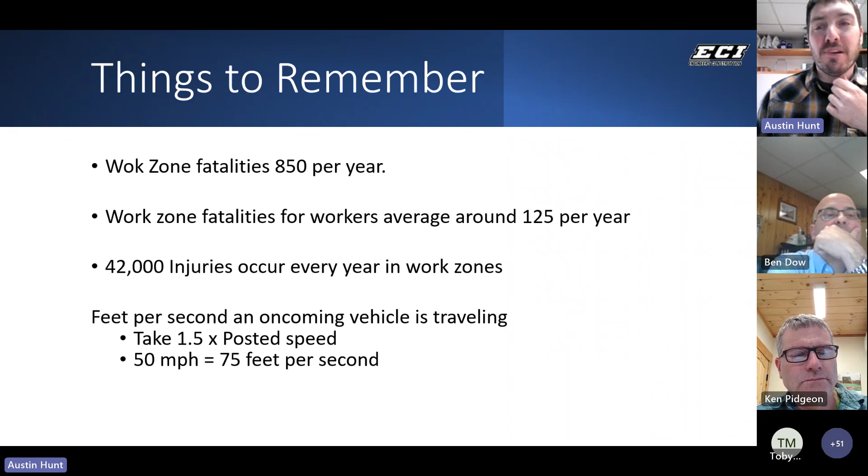So the topic this week I have is work zone awareness. Some things to remember. Work zone fatalities: there are 850 per year on average. This is the public and workers, and worker fatalities are around 125 per year, and then just 42,000 injuries occur every year in work zones. So it's something to keep in mind.

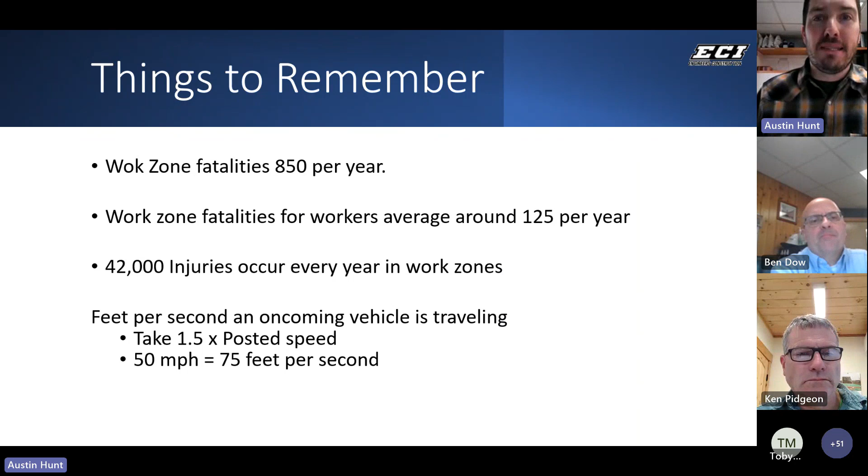Also, a good way to calculate how long you have to react to something: if the speed limit around your work zone is 50 miles per hour, you take that and times it by 1.5, so you get about 75 feet per second. So you don't have a lot of time to react when a car or something is coming. You have a split second to make a decision on what you're going to do. So it's good to look out for things and watch what's going on around you.

Some of the things to mitigate the risks when you're designing a traffic plan: can you eliminate the problem? Can you use detours, alternate routes? If you're working on the interstate, can you route traffic to the other lane to completely get it away from you? Can you use barriers that will protect the workers in the work zone from traffic? Engineering controls, traffic control devices, crash attenuators, things like that won't put anyone in harm's way, like a flagger staying out in the road, but will still get the driver's attention and stop them.

Then we can also use administrative control. These are things like doing work at night when traffic isn't as heavy. You might close the road at night for just local traffic only. And then finally, the last thing you can use is a flagger. Flaggers stay out on the road, but these put people in harm's way. Flagger is a very dangerous position.

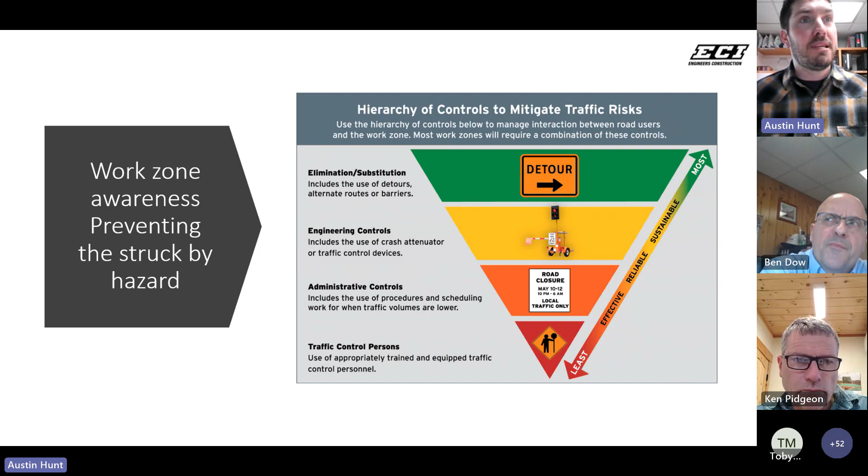Some best practices are to have a plan, review and understand the plan. Clearly identify any struck-by potential and discuss areas where you're going to access the zone or leave the zone, walk out of it. Have clear areas where that is. Keep yourself and fellow workers inside the closed lane. You don't want to be stepping out in traffic, things like that. And keep your head on a swivel and know your surroundings.

If you have to turn your back to traffic, make sure someone is there to look out for you and be able to see what's coming from behind you. If you can, avoid turning your back to traffic. Also, avoid blind spots so you can be seen. That also goes along with being visible. Wear your PPE, your vest, your high-vis clothing, things like that.

Work zones, traffic, public can be very unpredictable, and they can be on their phone or under the influence, something like that. So it's good to be aware and watch out for things. Good to have a plan and discuss all these things in your morning brief with your crew and during the JHA process. That's really all I have.

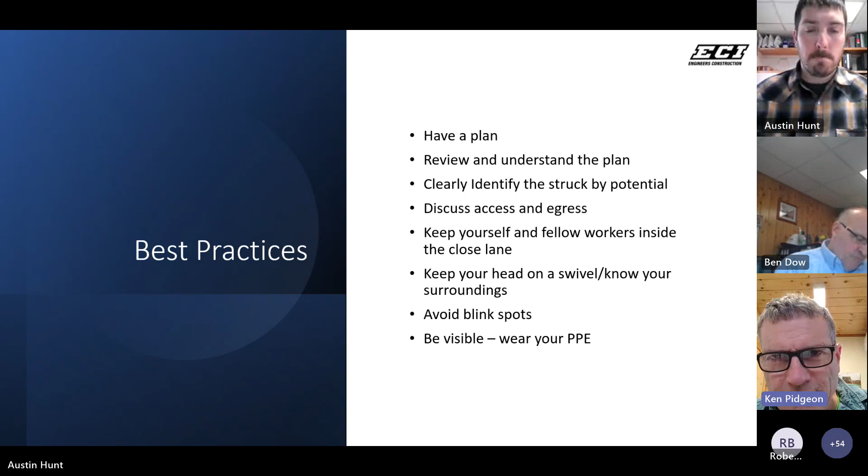Thanks, Austin. Being visible is important, obviously, and sometimes just being highly visible with high-vis clothing isn't quite enough. If there's a lot going on, the motorist needs to see movement of that bright person. That's one of the reasons the flaggers for Williston Road start out using the stop-go paddles with the flashing lights on them.

Are they still using those? I don't know. I know night work they are required to have that. During the day I don't think so, maybe not so much.

But certainly something with movement. If you've got a stop-go paddle, just moving it a little bit helps, because when you come up to a busy construction site, your eyes are trying to absorb everything, and that one little guy standing out front not moving isn't really effective.

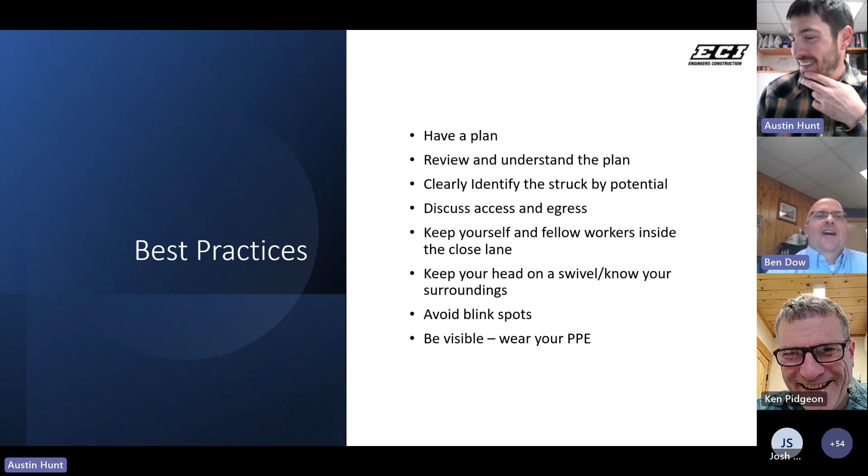No, we lost you, Ken? I think we lost him. Oh, no, I'm here. Oh, there you are. Okay, I'm going to switch, I'm going to take over. All right.

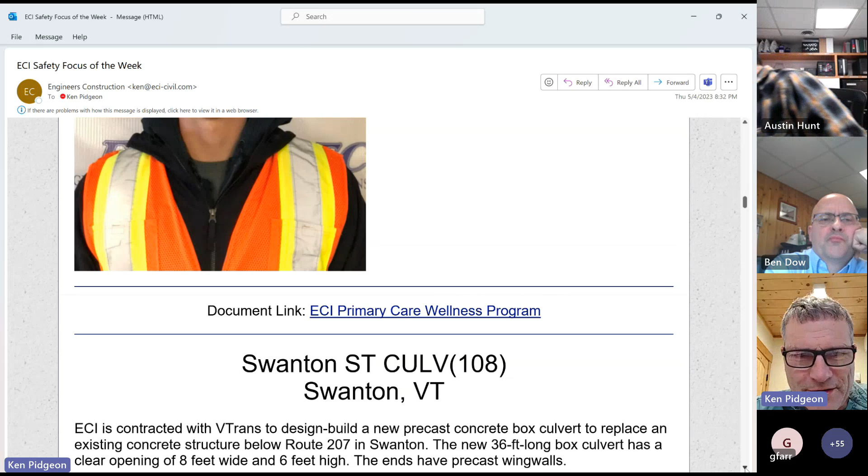And this week we're talking about the Swanton ST Culvert 108 in Swanton. Mark Peloquin, are you on? I am. You want to take over the screen, or you want me to scroll? You can scroll, Ken. Okay, I'll get scrolled up to the text for you, and you can start.

So ECI was contracted to do a design build of a new precast box culvert in Swanton on Route 207. The design had some minimum requirements: it was 36 feet with an opening of 8 by 6 and 4 precast wing walls. The work required a maximum of a 3-day road closure, which meant to put a new box in, we had to close the whole road.

We started last Friday at 7 a.m. closing the road, which meant we'd have to reopen it by Monday morning at 7 a.m. The ECI work crews, including Charlie's crew and Charlie Fecto and Rob Barber's crews, worked Friday night. Charlie worked the days and Rob's crew worked nights, late Friday night and all night Saturday night, with the backfill working through Saturday night and the pavers coming in Sunday morning and cleaning it up for us.

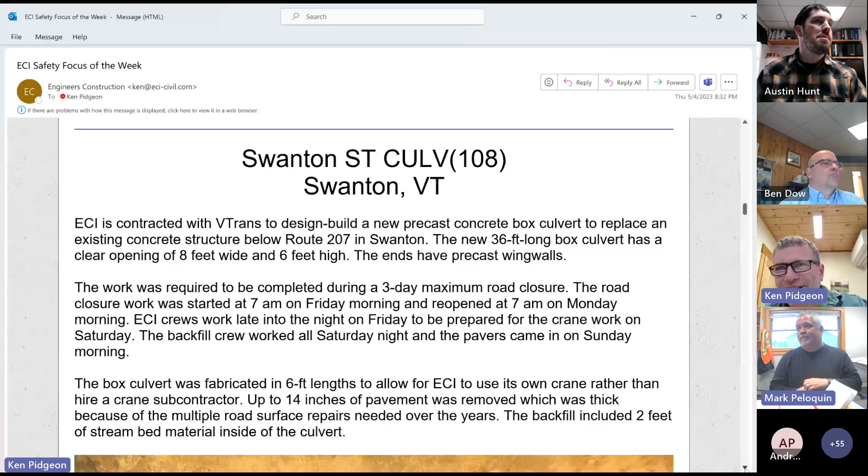Want to go down to the existing picture? Oh, of the structure, yes. Ken? Yes, sorry.

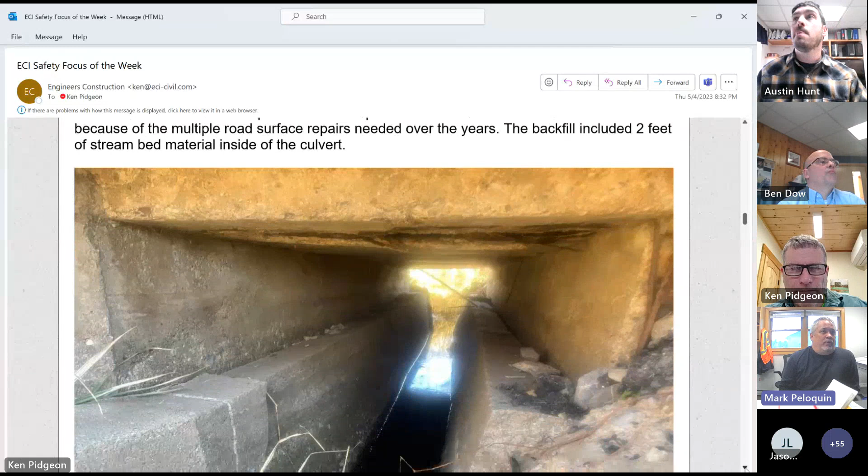So this was the structure we were replacing. As you can see, it was kind of an amalgamation over the years where they went in and poured some footing concrete. My guess is the old walls were starting to rotate, and they put this in at the toes to keep it from rotating. The structure the guys pulled out, Charlie and those guys pulled out in a matter of hours. What we found was the concrete was very old riverstone concrete with all sorts of different steel in it. We even found a railroad tie at one point that they used for steel inside the wall. So I don't know what year this structure was built, but it definitely had seen its design life for sure, multiple years over.

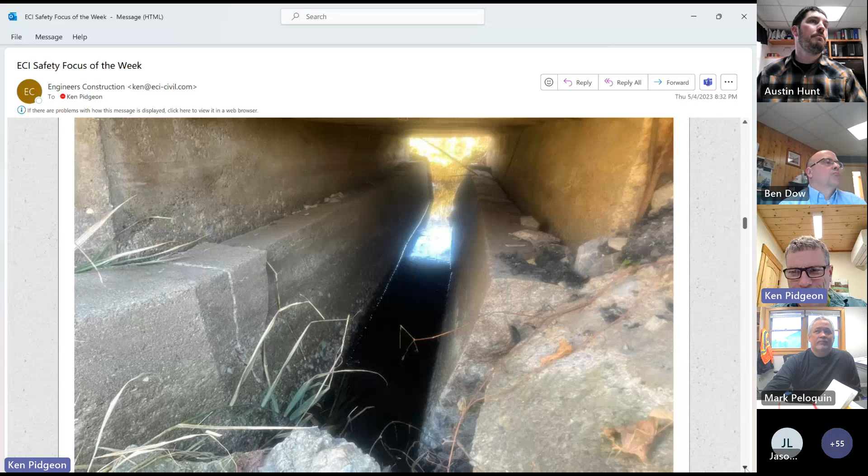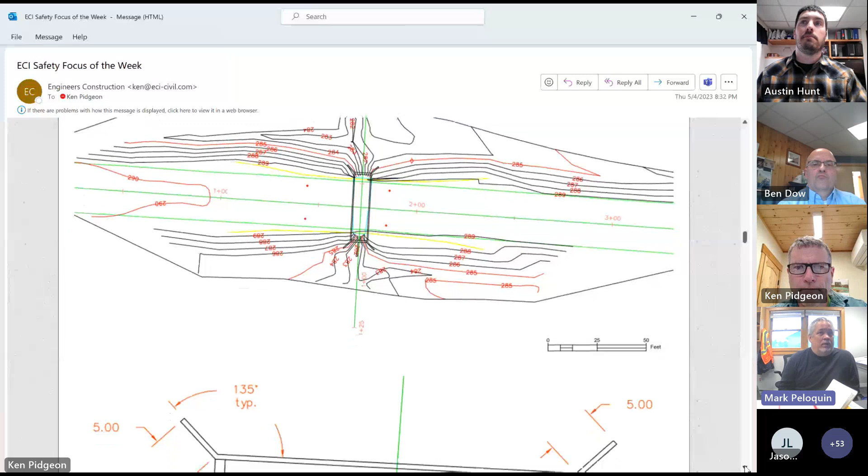Again, this is the plan that was developed in-house. Mike Plombley and Rich and Gunner surveyed it, and Alex Flynn did all the design work. Alex is new here from AOT, so some of you folks probably haven't met him yet, but he did all the design work.

We submitted it to AOT for approval. I think we submitted in January. Alex did the design—I think we started shortly after Christmas and finished it up and sent it off. Then of course we had to send the design off to the precast box supplier to do their design of the actual box itself.

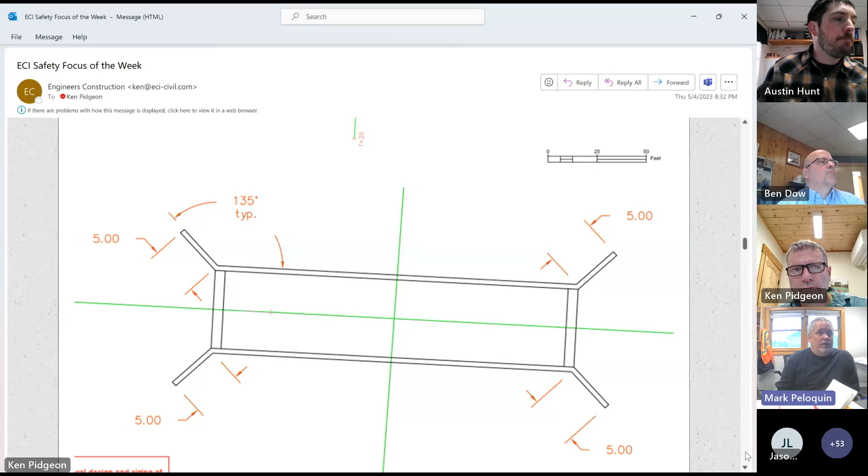Again, this is more of the design. You can see the length of the structure is 36 feet with the wing walls on either entrance. There's a couple of cutoff walls on either end. And these head walls look like they're a separate piece—they actually were on the inlet and outlet box sections, which made those the heaviest picks. I think the heaviest pick was right around 23,000 pounds.

This image is a little different, right? Because it shows a head wall sticking above the structure. Yeah, it did, Ken, because we had to capture the gravel. So those head walls allow us to build the gravel section through the box culvert. Oh, okay.

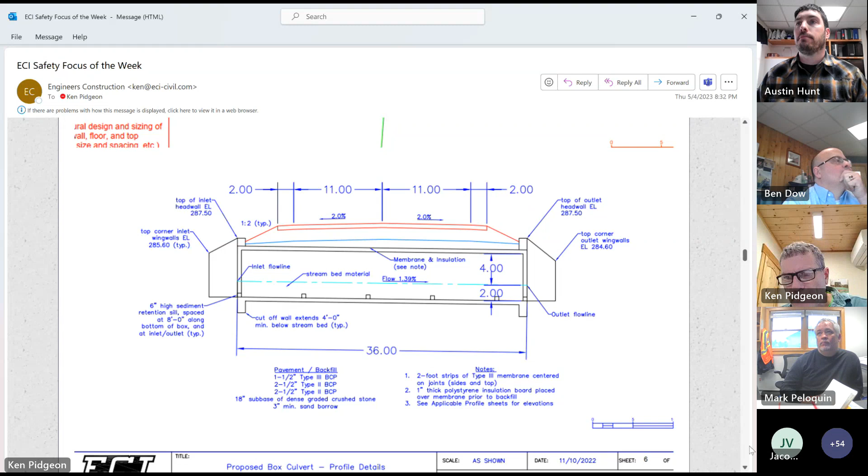This was a couple weeks ago. Yep, last Thursday, Daryl and Sean and crew went up and milled it. We did this actually under traffic—we didn't close the road for this portion of the work.

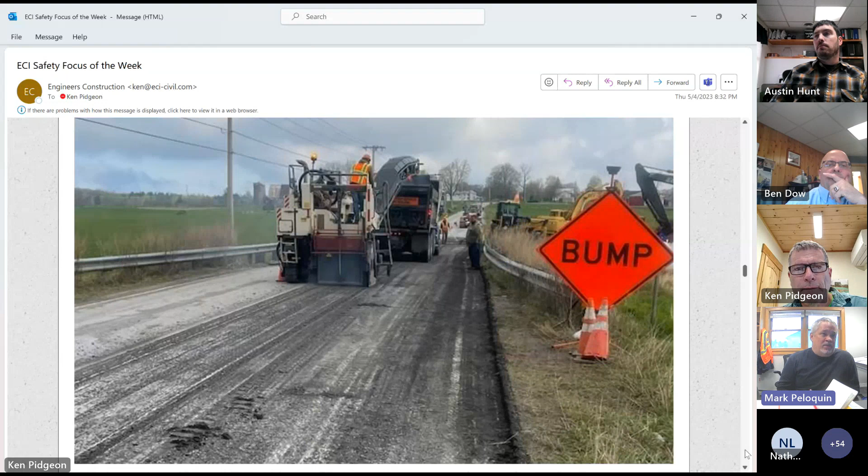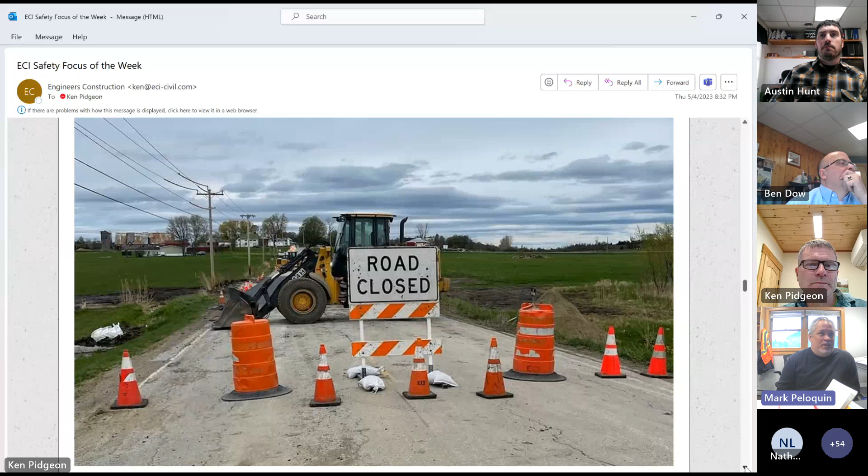Rob and crew were up there. I think they started the Tuesday before with just prepping stuff, getting pumps, and you'll see in some of these later photos it was a very wet hole. Of course, typically box culverts are June, July, and August work, because usually they don't let you into the stream till then. But they were nervous that this structure was going to fail.

In that previous photo you probably could see the cracking on the deck of the bridge. When we bid it, they wanted us to do it last fall, but with the design and getting into a precast schedule, that just wasn't going to happen. Our completion date was May 13th of this year, and with any luck—I'm going up here this morning to meet L&D to get it striped, and that's the last task to getting this thing done.

This is a picture of Sunday after we finished paving. The road was closed till Monday morning—we didn't want traffic going through, so you can see one loader here in the foreground and one in the background. We closed the road like this and put the loaders just so somebody wouldn't drive through our cones and across the structure and go into the drink, because there's no guardrail. Guardrail was scheduled for first thing Monday morning.

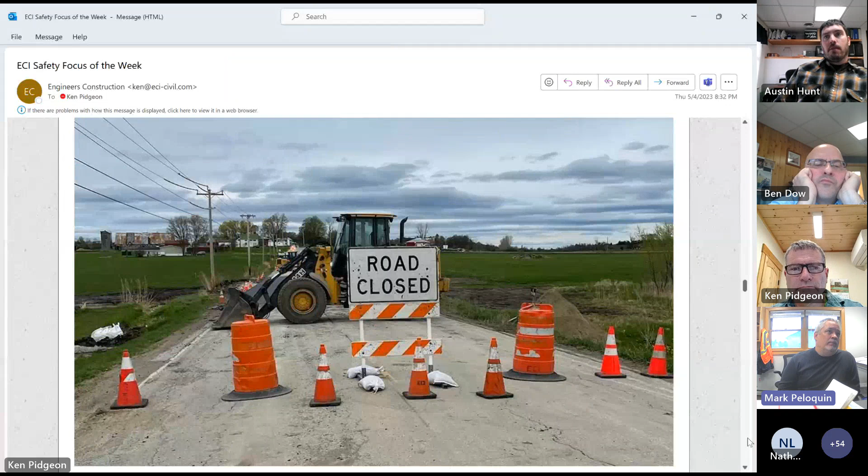Yeah, this is a good picture of how wet our hole was. We actually ended up undercutting a couple feet. I think we ended up running 4 submersible 3-inch pumps and our big diesel pump. I don't believe the diesel pump ran once we got ahead of it. We had to impound the water—you can see the sandbags in the background. This thing was so flat we had to impound the water on both sides and pump around us, because it would come back on us if we didn't.

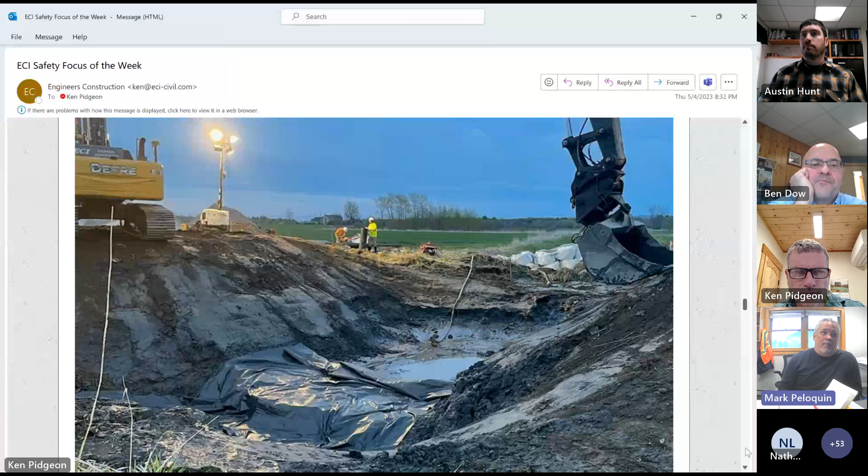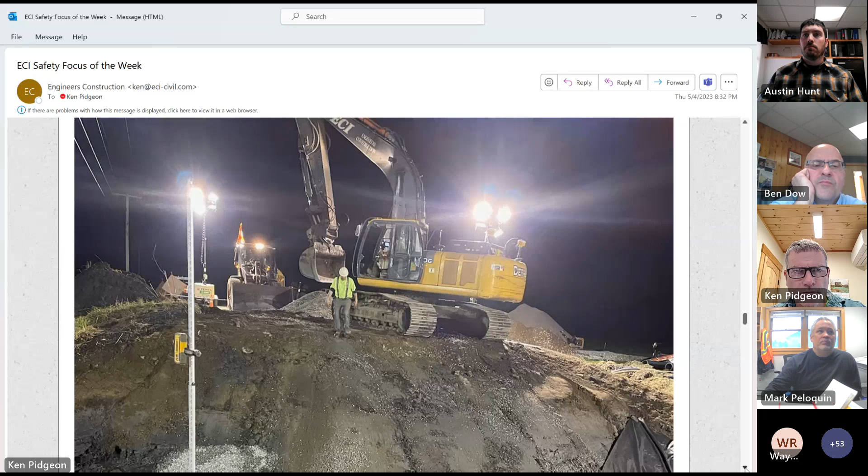So right here's our undercut. You can see Rich and Gunner came out and helped with the layout there. I think this was probably 9 or 10 o'clock Friday night.

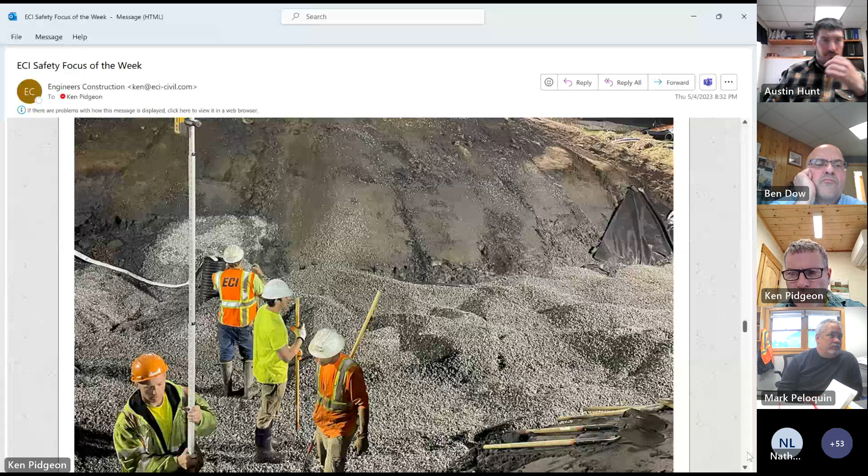Combination of GPS—you can see Gunner's running the laser rod right there. This picture is actually the opposite end, where they're... I almost think you can see a piece of the cutoff wall behind the bucket there—we're setting the cutoff wall. So you set the cutoff walls and then you grade to them in preparation for setting the box, and the inlet and outlet pieces set on those cutoff walls.

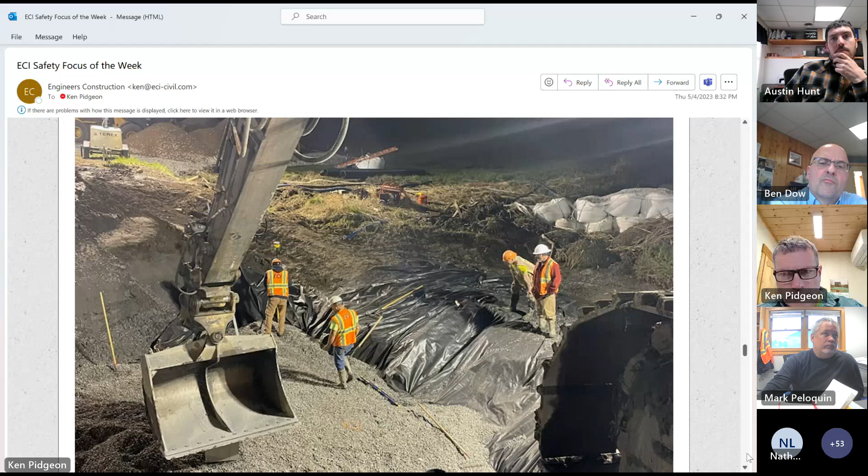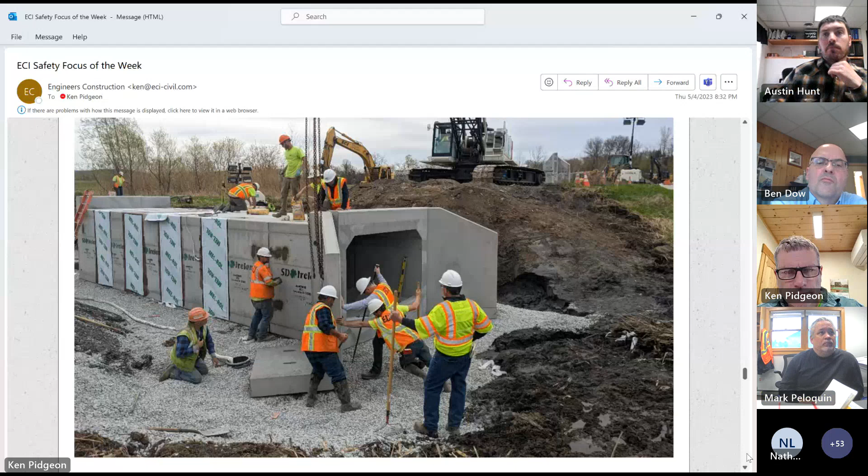This is, you can see the box is all set at this point. We're fighting with the wing walls at this point. In the foreground there is John Wilkin, he was the state inspector. You can see Wayne and Jeremy. Phil operated the crane for us, did a great job.

In this picture here you can see in the background to the right a power pole. There was probably 3 to 5 foot of clearance on the power lines, which we had sleeved and insulated, but it was tight. We actually had a plan that if Phil wasn't comfortable when he got there, we were going to set those 2 wing walls specifically with the excavator, but Phil was comfortable with it and we set them with the crane.

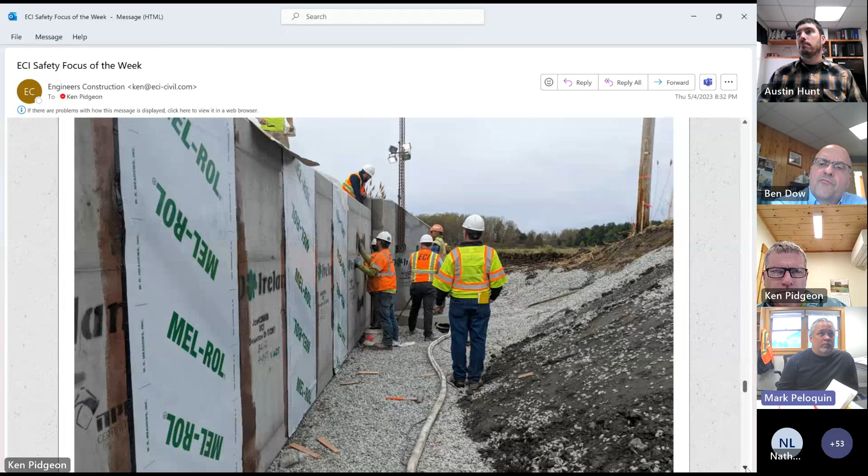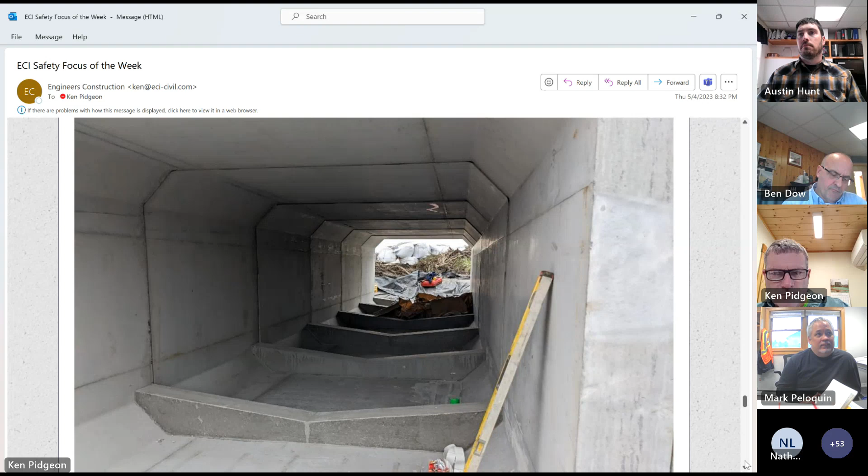The way we put the stone in the box, they would dump the stone in front of the box and then push it in. Mike Bishop kind of drew the short straw, he got to go in and out of the structure ducking his head sideways. Maybe they picked the shortest guy, which I was glad I wasn't on site for, because it would have been me.

Again, you can see a couple pictures here. One is Phil operating the crane, picking the structures off. We trucked two of the pieces up to the site, and Ireland, who supplied the box, trucked the other six pieces. The picture on the right shows the finished product.

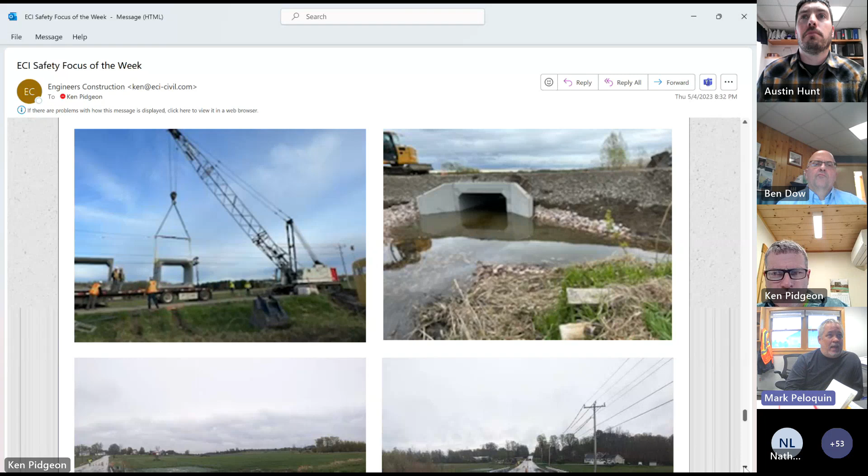After we let the water back through the structure, Rob came up with a plan. Originally we were going to do the E-stone on Monday, but since we were supposed to get heavy rain on Monday, he decided, which was a good decision, to go ahead and slam that E-stone in Sunday night. That way we could let the water back through the structure and not have to deal with water and E-stone on Monday morning.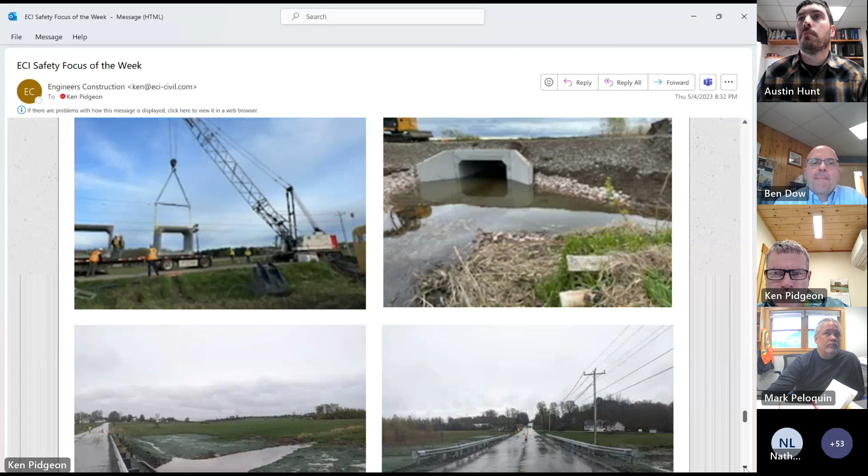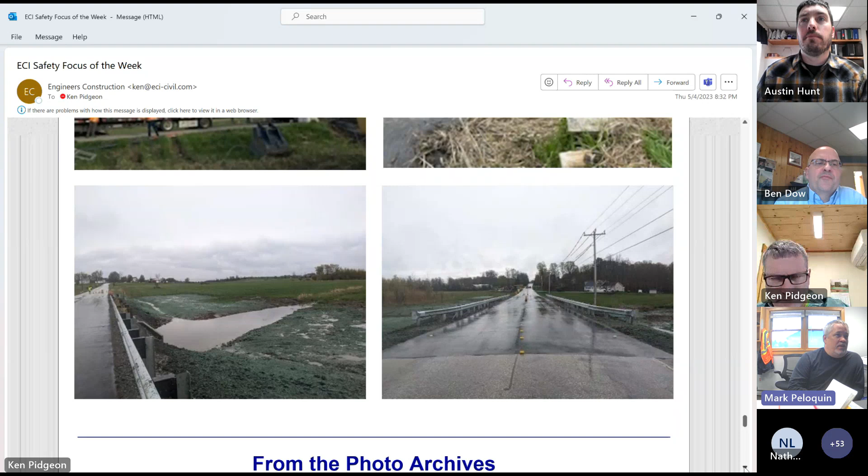You can see here, it's all hydro-seeded, the guardrail's in on the left, and you can see the amount of water that's ponding there. My guess is this has equalized a little since then, but I'm guessing there'll be some ponding for a while, since those drainage swales for the farmer fields aren't great - ditching wasn't part of our contract, but they could use a good ditching. Further down the ditch on site there were trees and shrubs growing right in the ditch line, so it hadn't been done for a while.

The picture on the right was taken Monday, I believe. The RPMs are in, the guardrails are all in, everything's hydro-seeded, and you can see how wet it was Monday. So getting that E-stone in on Saturday night was the right decision.

Some of the ones I'd been on, the night crew would come in at 6 p.m. and the day crew would leave at 6 p.m., and there was no transition, no overlap. So they'd have to figure out where the other guys left off. But here there was great communication.

Mike Ronaldo came up on Saturday and Sunday and did some gravel testing, compaction testing, and some hot mix testing for us. Daryl's crew showed up when they were supposed to. On Sunday we had a little bit of plant problems, which was Pike's issue, not ours, but we got through that and got it all paved. It was a great success with how everybody communicated.

The biggest thing with night and day work and people working a lot of hours - nobody got hurt. I was up there all weekend, and the site was really safe. We had good cutbacks on our slopes. It was just a great teamwork effort, and I appreciate everybody that came out and had a part in the project.

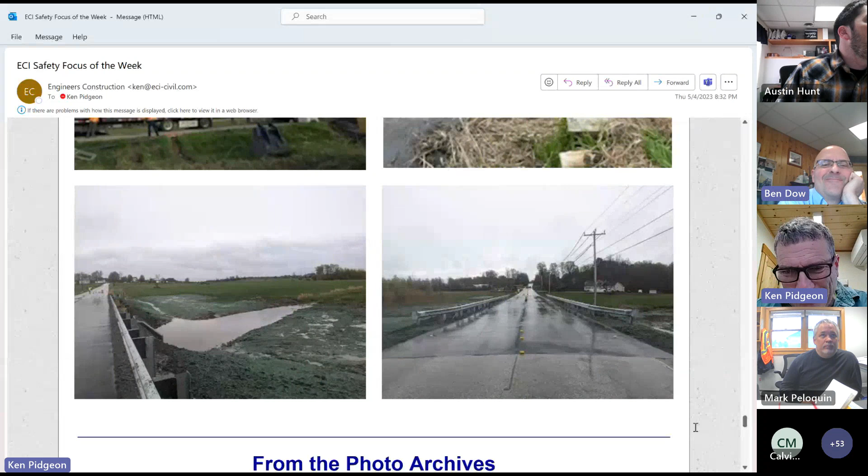I forgot to put in the paving photos. I've been pulling all these photos together from different sources and I forgot them, so I apologize to the pavers. I don't have them readily accessible to show right now either, so my apologies, and we'll make up for it.

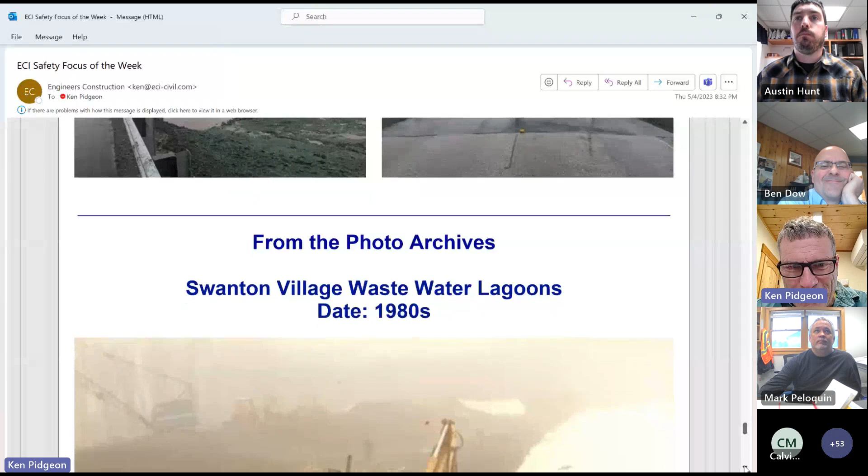Thanks, Mark. So for the photo archives, we have a picture from the Swanton Village wastewater lagoons back in the 1980s. I don't know if that old backhoe was stuck - I see it's hooked to a chain, kind of coming out of the hole there. Way back then, we believe that's Alan. It's hard to tell in this grainy photo from the old days, it's a scan of a photograph.